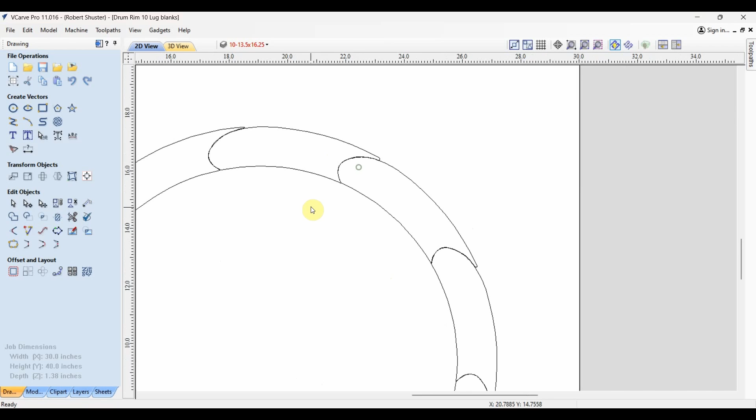As I mentioned before, there's multiple CNC steps for making these rings, so I'll be in and out of design software and shots of the CNC working 3 different times. So the first part is making the blanks. The drum will have 10 lugs. There'll be 10 different pieces here that wrap around. I did a video on this process before, so if you're interested at all in it, you can go to that video and look at it.

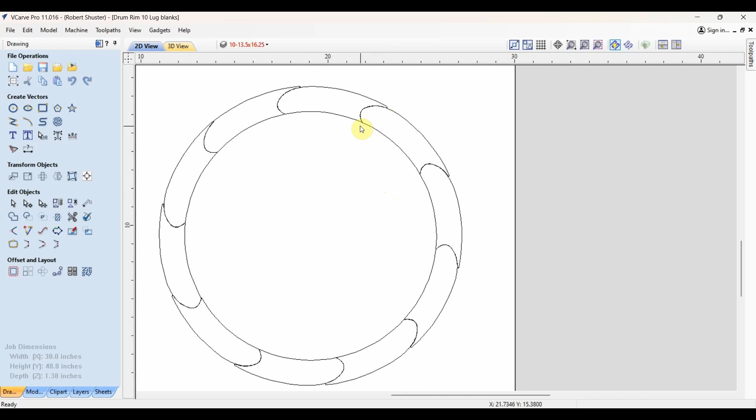Notice how each piece comes together. As I put a strap around this and tighten it up, it pulls it against itself, and I don't need a jig for this to work for clamping, gluing. It actually is quite easy in the end, and it makes a nice shape. I like how I've added a rounded edge to that. So you'll see that rounded shape on the rims for the joint, which, again, is a little prettier.

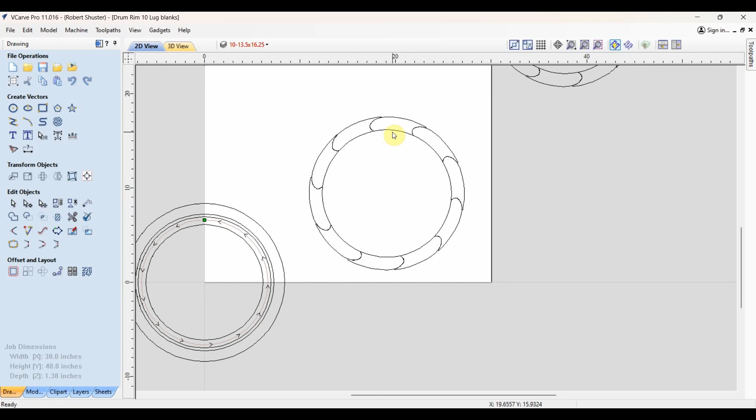After I've cut these out and glued them up, here's a skimming toolpath. I will skim one edge to get it nice and flat, because eventually I will take that to the table saw to split this in 2. This joint, in theory, is a little weaker, so I will split it and then rotate 2 pieces. There'll be 3 pieces total. Rotate so the joint never matches up, so it should make it stronger yet.

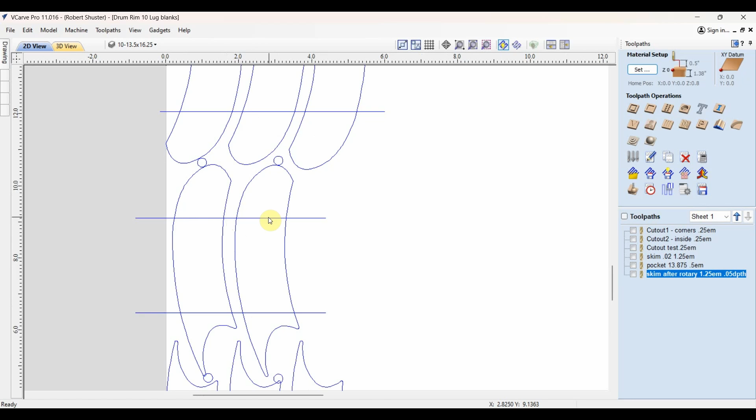This is what it looks like when I cut out the toolpath. And I have those alignment spots so I can line up all my tabs to hold it together. I'm calling 5 of these right-handed and 5 of them left-handed, so there'll be tabs that hold these together. But when I glue it together, some tabs will be on the top, some will be on the bottom, and I use those tabs later to hold it down on the CNC for skimming and things like that. So those tabs actually, in the end, come in useful. A tab is when you cut it out. Let's run that toolpath.

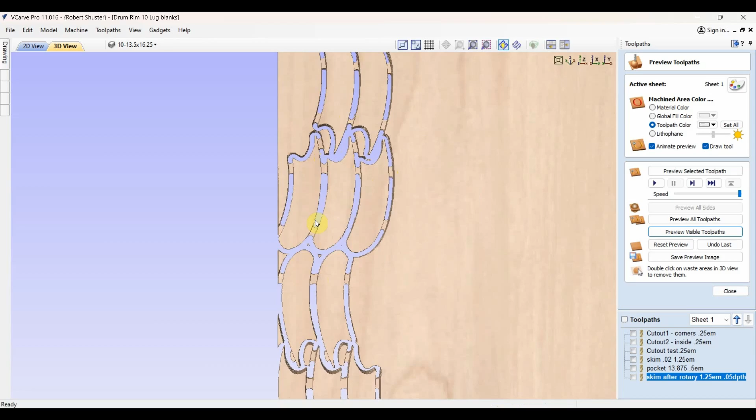The tabs are how it holds things together so it doesn't come off the table bed. And like I say, half these will be on the bottom and half will be on the top when I glue it together. Of course, cut those off. The tabs split down in the middle with my bandsaw. So let's take this out to the CNC machine and see that next step.

When I first set this up, I was a little nervous about where to place the clamps. I was worried about the router hitting the clamps and, of course, things falling apart, ruining the project. So I'm actually doing 2 different tool paths. One I'm calling corners and one I'm calling inside. If you notice here that it's kind of the outside corners, and I have that clamp in the middle closest to us. When I do the next tool path, I'll move the clamps around, and the clamps will be where the cuts have already happened, so there's no chance of it hitting there.

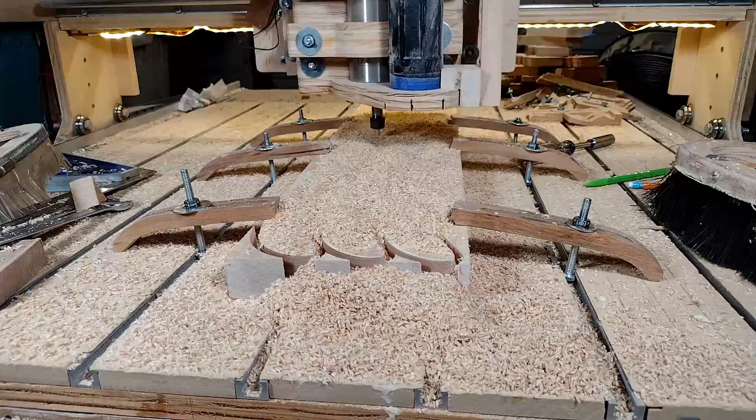And once again, for YouTube, I am not using dust collection, so you can see a lot of chips stacking up around the project. For the glue up, I've got it laying in place there. You can see how the joints fit together. And notice how on some of these the tabs are on the top and some are on the bottom. I mentioned that earlier. That works great for a clamping spot when I put it on the CNC when I need to get one side perfectly smooth.

I put glue on both sides of the joint. I don't go light. Some people probably think I'm crazy wasting glue, but again, I'd rather have a little too much glue than not enough. I've ruined projects in the past where I didn't have quite enough glue and things fell apart and there's no way to fix it. So that's my motto.

And again, laid in place here, put my strap clamp out. And also those tabs, some on the bottom, some on the top, really hold the strap in place very well. After I put the strap clamp on, I will verify it's round using a tape measure, measuring a few spots, but it wants to conform to that shape cut on the CNC, so it forces it into round anyway, almost automatically. So even though I do little tests to verify, it always works out very well.

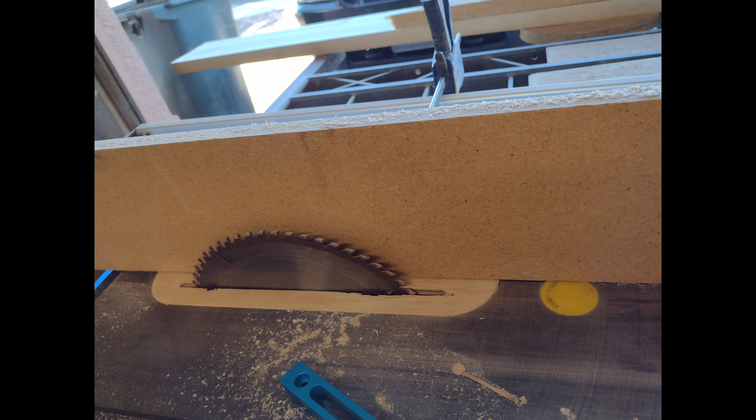I mention this all the time, but I do not like videos of me running a table saw. The table saw intimidates me, I'm nervous about it, and I do not want to worry about getting a good shot over keeping my fingers. So here's just my basic setup with some photos. I have a tall fence that I put against my normal fence.

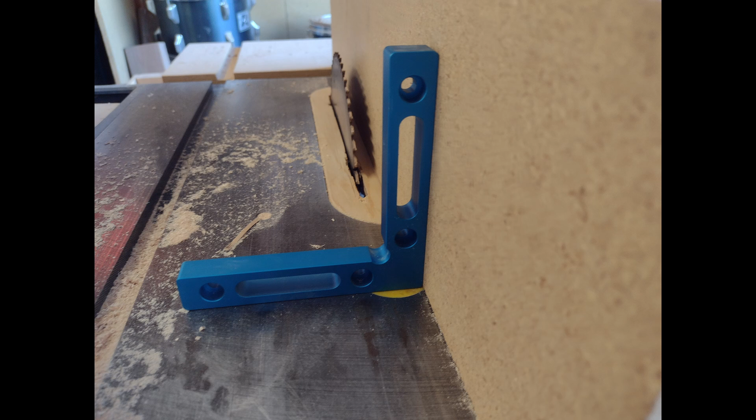I make sure it's a good 90 degrees, and then I will run those rims through the table saw multiple times, keep rotating a little bit, push it through, rotate more, push it through, until I get it split into two pieces. If I take my time, I get a very good finish doing it this way. I don't need to worry about planing it or anything else to get a good finish so it's ready for glue up. And speaking of glue ups, it's that time now. I'm putting plenty of glue on both sides of the rims and going to align them well.

But first, check out that man glitter. You can tell I've been hard at work, and I'm sure I'm driving all the girls crazy with that man glitter. Okay, back to reality again.

Let's do the glue ups. Plenty of glue. 3 pieces. The middle piece is actually beech. The outside rings are hard maple or rock maple. Lots of terms out there for it. It's actually got some heartwood in it to give it more color, which a lot of people don't like, but I like to see the difference in the grains and some color differences in the rims. So I specifically wanted the heartwood in there, or country maple, some people call that one too.

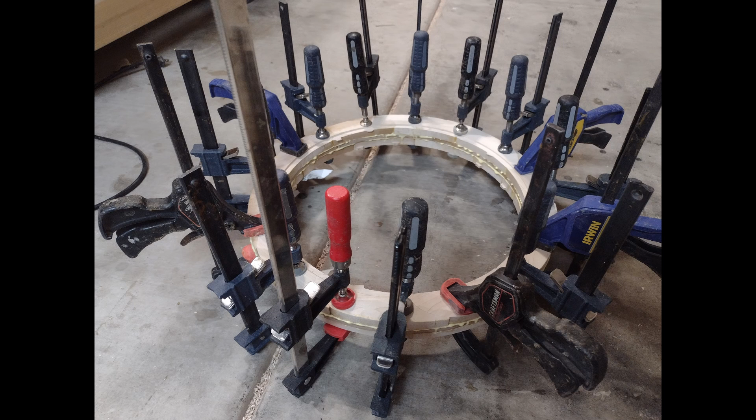There's an old woodworker saying out there, you never have enough clamps, and I could probably use more clamps. I put 10 clamps around the edge there. It might be more, I didn't bother counting, but a bunch of clamps get even pressure on that. I will let it sit overnight, and on the next day, it's time to move on to the next step.

For step 2, I'm going to take this basic shape, this 10-sided or decagon, and I'm going to take it into DesignSpark, which is a 3D modeling program, and I'm going to make that a 3D file instead of right now it's just a 2D outline. It's a kind of convoluted step to do that because I can export this to a DXF file, which a lot of programs work with, but for some reason DesignSpark only works with STEP files.

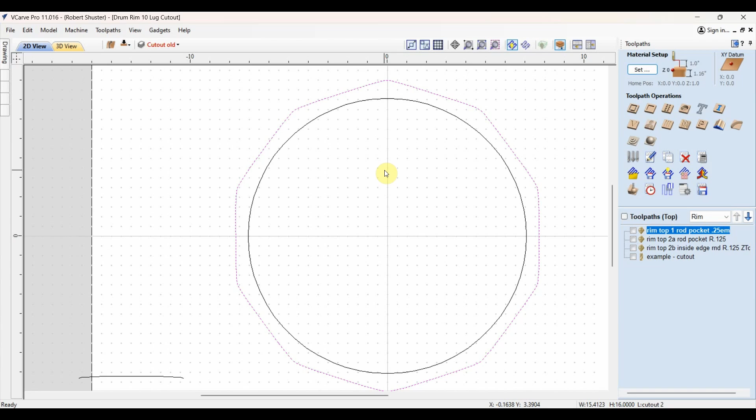So I have to export that to DXF, then take it into FreeCAD, where I can convert that DXF into a STEP file, then import that into DesignSpark. So once I have it in DesignSpark, we'll skip the whole FreeCAD process. I took that 10-sided shape and I extruded it out.

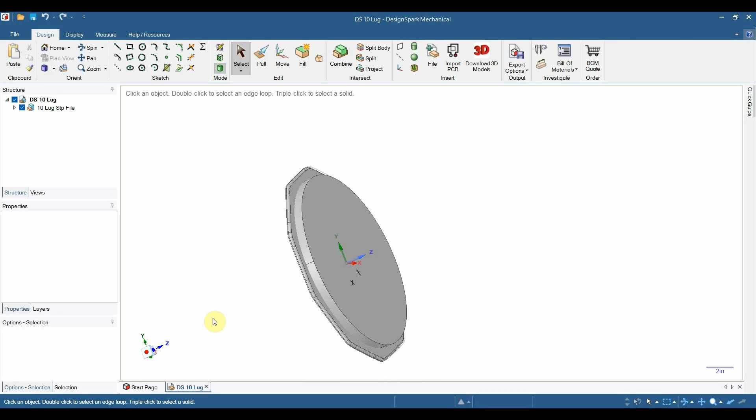I'm not going to show that whole process because I'm not very good at it. And I extruded out, then I rounded those corners on that, so it's got a rounded edge. That's important to me. And I also had to put a circle in the middle, and it's basically 1 inch from this edge here to the outside edge there. That's important when I'm working with 3D files.

Usually when you cut a 3D file, the CNC goes to the edge, and then once it's done with that file, it goes down to the 0 point. Well, the problem on the rotary is that 0 point is that threaded rod in the middle. It's 8 inches down from the edge. So if I don't have that ring here, this circle, the CNC at the edge of that rim would try to drop all the way down 8 inches, and of course it doesn't have much play. It can't go that far down anyway, and it would crash into the rim also.

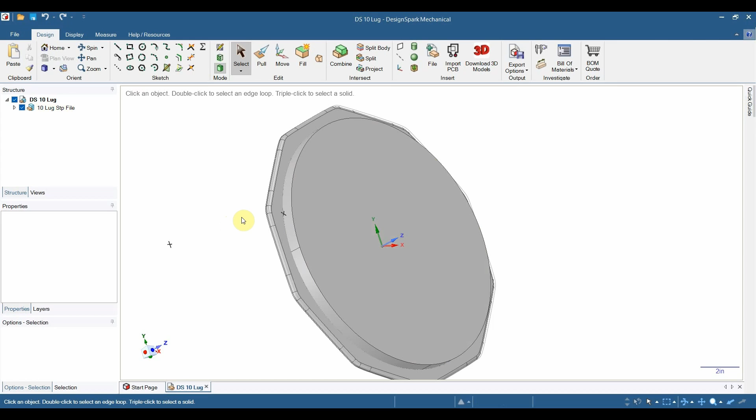So I will tell it to go the shape and then a little bit over and stop at that point there. So you'll never see this in the end on the drum, but of course right now I need it or else the CNC won't work. I will take this back into my 3D modeling program and I will copy it again on the reverse side. So you'll see 2 sides like that, and then I will stretch it and whatnot.

So I get that same, you've heard me talk multiple times about how I get that compound radius. The more I stretch it, it'll get wider this way, but still the same depth here.

Of course, I'm getting messages on my phone.

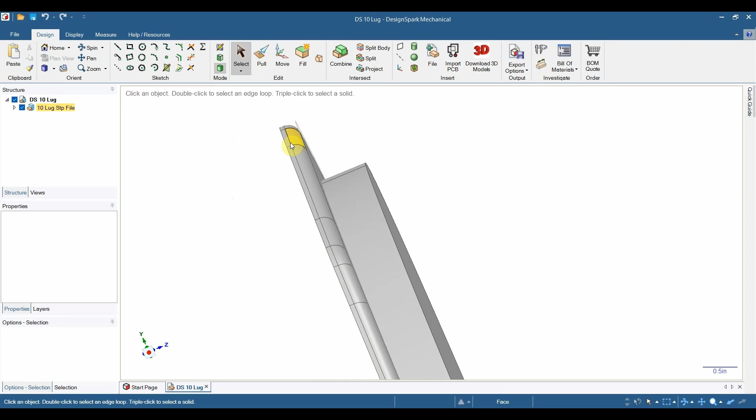So it'll round it and it'll give more of that compound shape I want. And then once that's done, I'll go one step further, and I'm going to have some designs on this edge of the rim. We'll go back and look at that now in VCarve Pro.

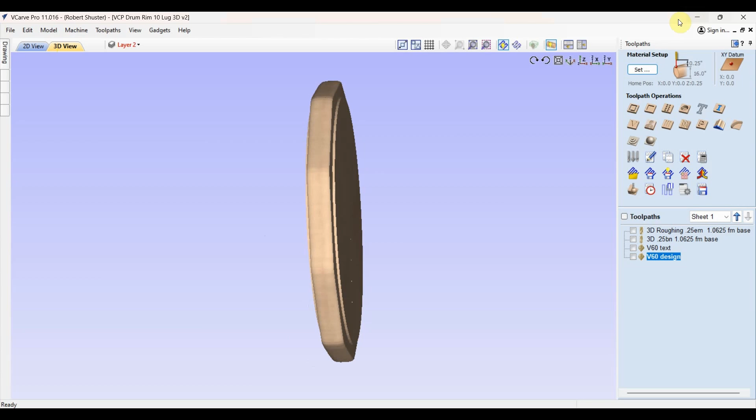So I've pulled that shape into VCarve Pro now, and if we look at this closely, let's go back over to the design part, the modeling part. There's actually two parts to the model right here. There's one half and the other half, where I just simply reversed it so it looks like one piece. And it is one piece in the end. There's that edge where it'll cut down this far and it'll stop at that point.

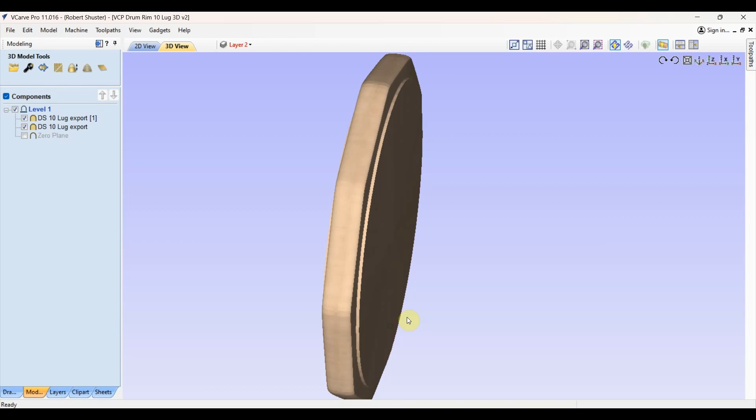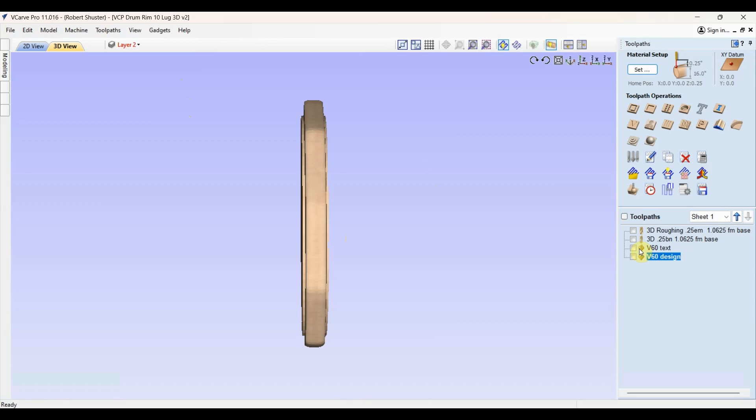So when the toolpath is running, it'll start here, go around, and keep going back and forth all the way around. It takes several hours for it to get around the rim, but it's the exact shape that I want. I wanted that rounded edge on the outside. So it's got that little arc that's kind of rounded that way. And plus now, I can add some design work to it.

Actually, let's go ahead and tell it to run this. We'll preview all the toolpaths, which is going to take it a second. First it does a roughing toolpath, cuts away excess. I tried doing without that, because normally when I do a 3D carve, I don't worry about roughing, because each pass back and forth only takes about 1/100 of an inch off. But because this is 16 inches around, I was getting chatter.

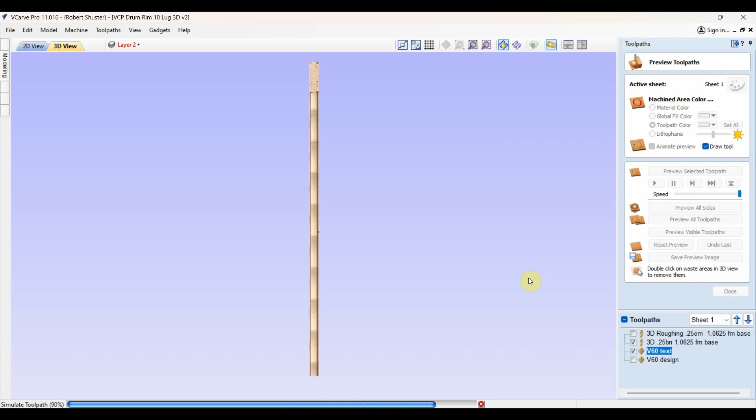I'm getting a big wheel on there, and because of the physics, the torque involved, the bigger that piece I'm cutting, the more edge that bit gets when it bites. That's hard to explain if I even understand it all myself. But the more it does, the more chatter I get. So I had to do the roughing pass and then go a little slower. So this took longer than I expected, but as you can see, I've got my logo on there now.

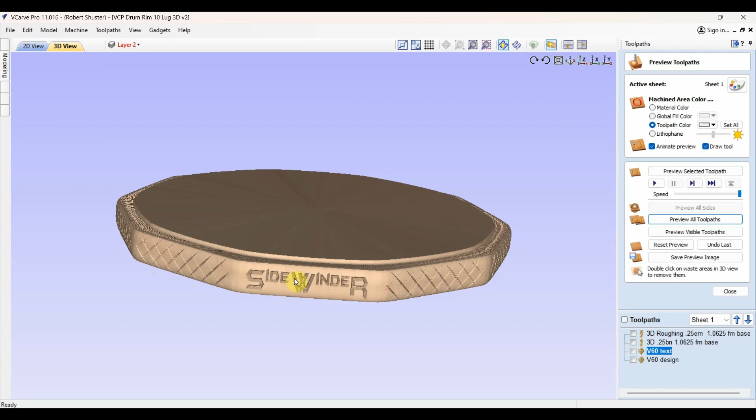And also I put a snakeskin design around the edge. Again, snakeskin drum, I figured a snakeskin rim. It all ties together. I put a lot of thought in this to get how I wanted. In theory, I could put other things around here, other text, other designs, but for this drum, it just seemed right. Let's just see what it says, how long it should take to do these things.

So just the roughing takes over an hour. The 3D pass takes almost 3 hours. Then the V-carving doesn't take long at all. In actuality, I beat that by a little bit, but not a lot. It's a long process. We could say probably 4 hours for each rim just on the rotary CNC, let alone cutting the blanks, finishing work and stuff.

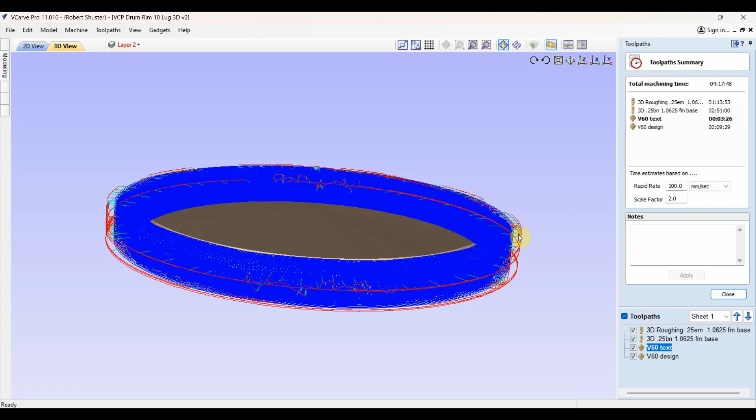A lot of time goes in these rims. I'm sure I could break this time down in a production line. I could get it a little less, but no matter what I do, these are not going to be easy to make. So that's what it looks like in the end. Let's take this over to the rotary CNC and cut this out.

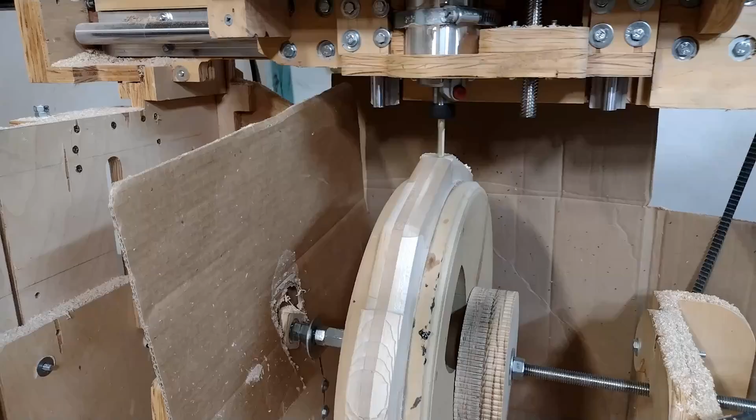If you look closely, you can see that the roughing toolpath has already been done. You can see those ridges along the edges. So now it's the finishing toolpath. That is a 1/4 inch ball nose.

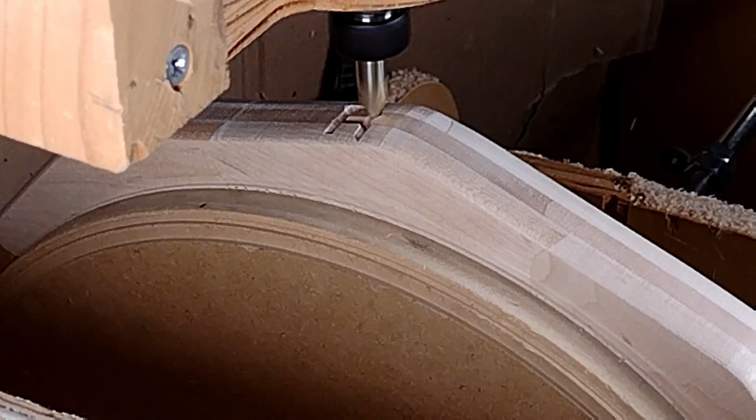And now we are on to the V-carving of the text. I have 2 separate toolpaths, one for the text and one for the design work. As I mentioned before, this is the downcut V60. I really like the downcut V60, and when there's intricate areas, a normal V-bit wants to pull the chips out or parts of the wood out, it chips out, whereas a downcut forces it down, and I don't get as much chipping on the edges, so I really like it for that type of tight design work.

I'd mentioned previously I work in IT. Our group writes software. I primarily work databases, but my team, we are developing applications, software packages, and often the user gets tunnel vision onto one specific little feature that in the grand scheme is probably pretty small, and those crazy features make the application a lot harder to write.

I'm guilty of that with these rims. I really wanted to be able to carve designs on the sides of the rim. In most situations, it's probably not that big a deal, but I tend to focus in on the little details sometimes, trying to get the snakeskin design matched to the drum, these little features that a lot of people might not even catch, but to me it's a big deal. So I spent a lot of extra time just getting those little features to work out the way I wanted.

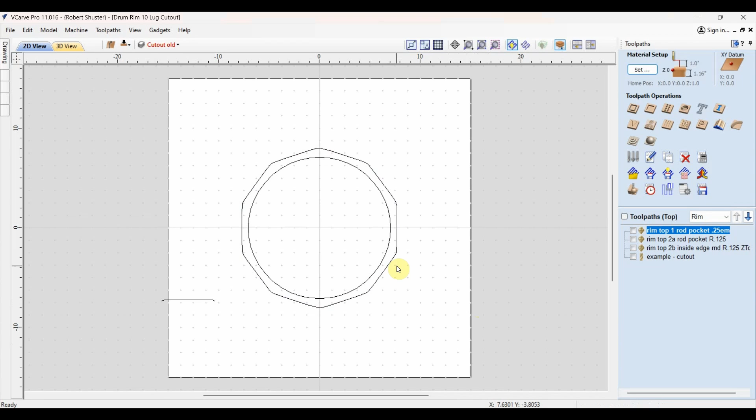So we're back to VCarve Pro, my design software. So now we have the rim that is ready to start the finishing process. For this project, this is actually a two-sided project. So in the setup here, this is double-sided. And I can go back and forth. It has a little yellow side for the bottom and the top. So here's the basic shape, and we can go back and forth so it looks the same right now, but

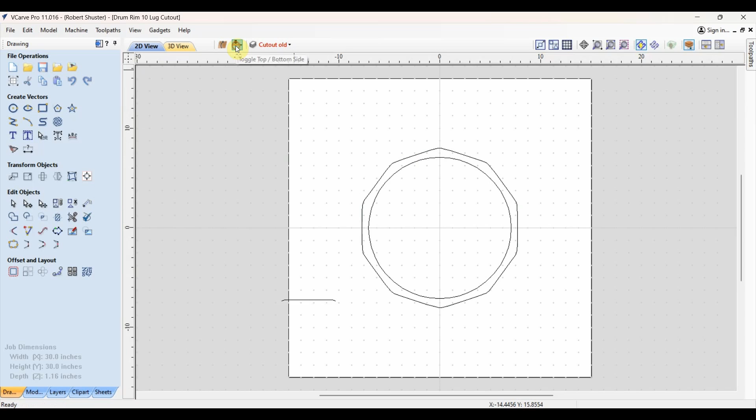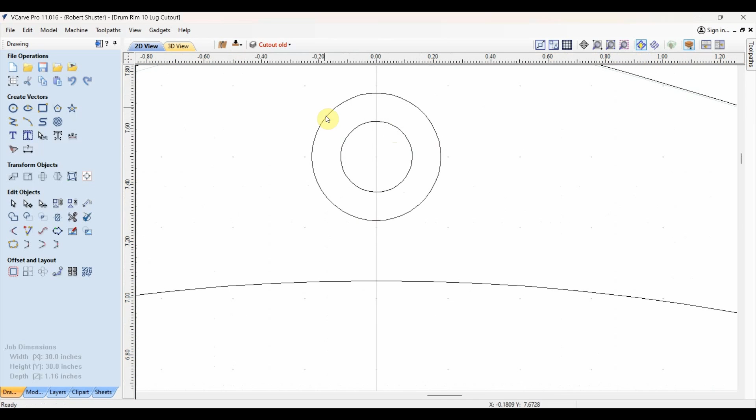I will be adding the holes the tension rods go through. Let's see if I can find the right toolpath for that. Lug holes. And on the other side, you can see that little gray line right there. Let's flip the other side. So the tension rod is like a bolt. It has a head on it. The bolt head will fit inside this pocket, and this will go all the way through. I also add a V-bit that rounds over the edge. That'll cut around these edges so it smooths that edge and smooths the edge here. This outside edge is kind of just for cosmetics at this point because it's already been cut out, that shape.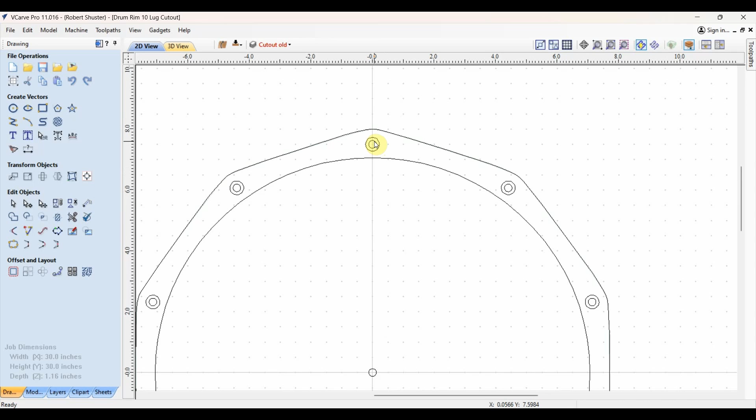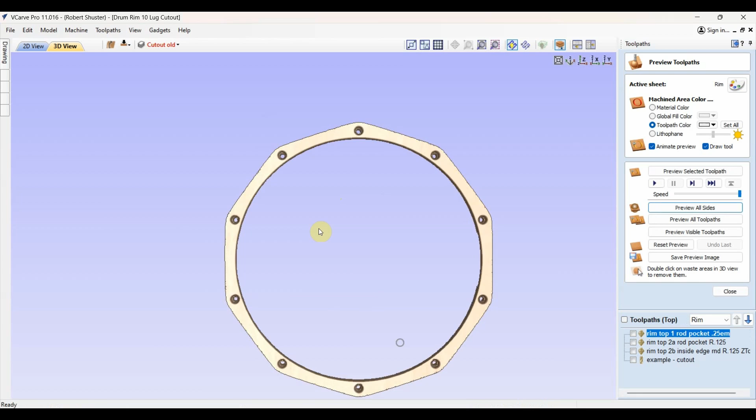To flip it over, I'm worried about this hole and this hole. And I will cut a hole into the bed of the CNC so that I can put a 1/4-inch bit through it and I can line up those holes again exactly right. So even when I flip it over, it should line up exactly right. It's probably easiest to show what I'm doing here by just previewing all the toolpaths, all sides. And like I said before, it shows this outside edge being cut out, which it's not cutting that out. That's just for cosmetics. It's already cut out when I put it in the machine.

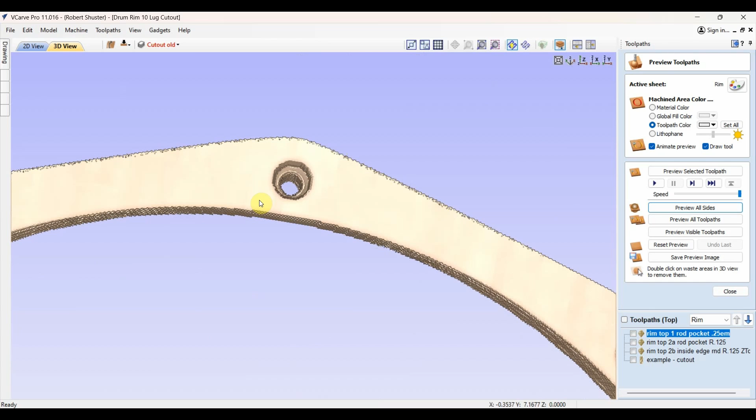So this is the top view. This pocket here is where the tension rod head will fit. And then the tension rod goes through that hole, then goes into the drum to hold everything tight into the lug. I've rounded over that edge there. I've rounded over this edge here. Let's go to the bottom now. And this little edge right here is where the drum head will fit in that pocket, the outside edge. And for the bottom head, this is for the snare wires to go through. It'll make more sense later when we actually see it on the drum.

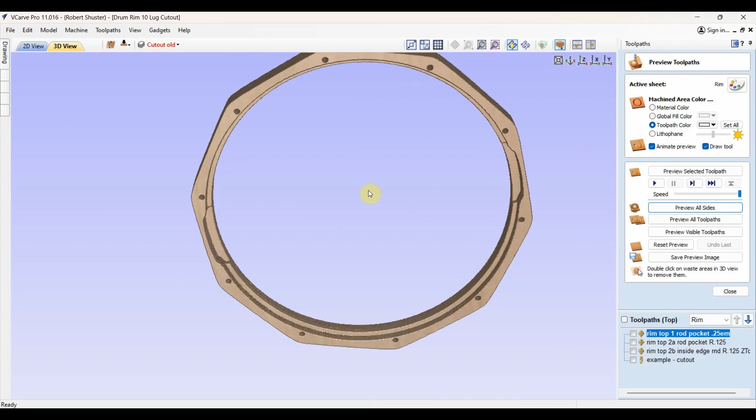So let's head out to the CNC and do this final step of CNC work. This is the bottom of the rim. That's the first thing I will be working on the CNC machine. I actually already cut the inside edge all the way through. That video did not turn out well, so we're just going to skip it. Next step is drilling the tension rod holes, all the way through, those 10 holes. And then the final step will be cutting that inside lip. It took multiple passes, but for time's sake, I am cutting it down to a single pass going around. And a quick cleanup with the vacuum and verify the drum head fits in that pocket well, and it does, as expected.

I'm about to drill the alignment holes on the bed of the CNC. Note above that red line there, I'm typing in the manual commands to move the CNC to where the top hole is, which is 7.5 inches above center. And I'll manually turn on the CNC and go down a bit. And then I'll quickly change that 7.5 to minus 7.5, so it'll go the other direction, below the center point,

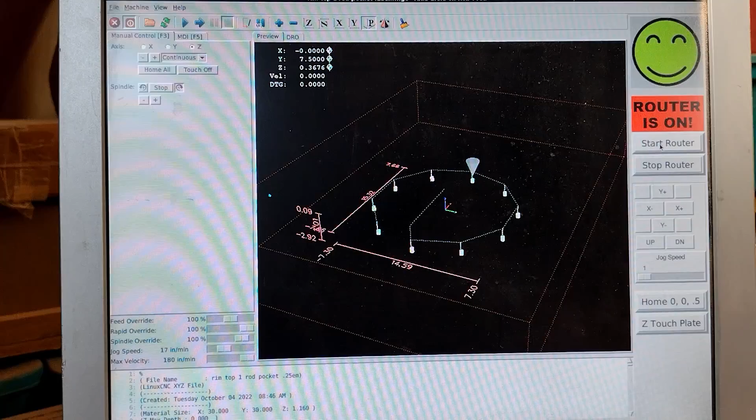7.5. And those holes are 15 inches across, so of course, half of 15 inches is 7.5. Pretty basic math there. Move it down and drop it down. I'm using the keyboard for up and down. I have a button on my pad, you notice, where I can start the router and stop.

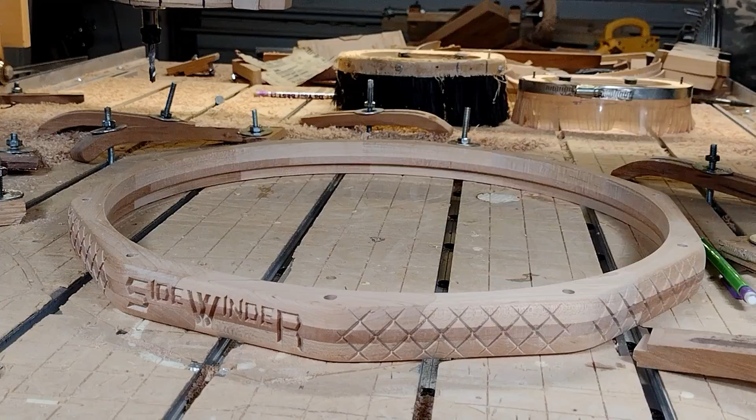Once we have the holes in the bed, then it's time to align the rim up to those holes. I'm just using some end mills, 1/4-inch end mills, push them through, nice and tight fit. Align those holes in the bed that I have, and it's pretty obvious when they drop in just right. And there we go. And now I'll clamp it down so it doesn't move any.

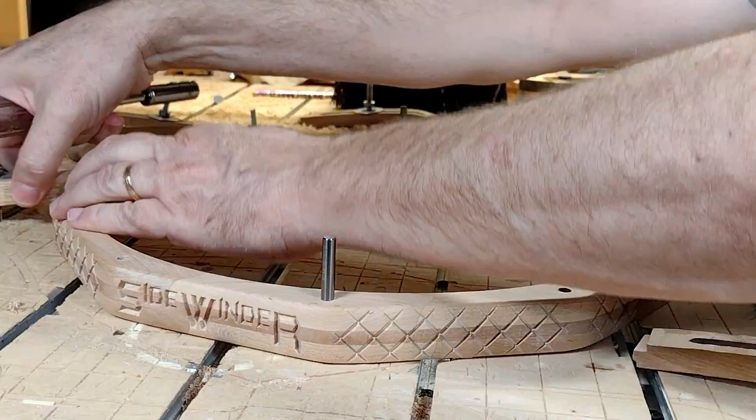And now suddenly, when I work on the top of the rim, it'll line exactly right to things I did on the bottom of the rim. Very important it lines up just right. I can't forget to take out those end mills, the alignment pins, because if I forgot, bad things would happen when we start doing real tool paths.

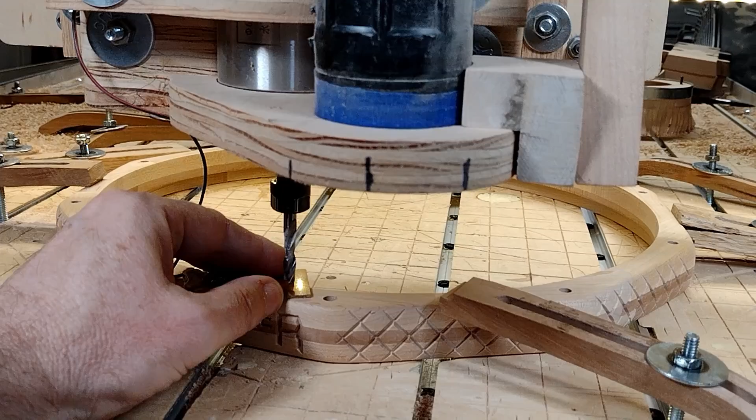I'll use the touch plate to set the height of the CNC so it knows where the top of that rim is. And in this tool path, I will cut the pockets that the heads of the tension rods will drop into. And another quick cleanup so I can get the dust and chips outside those pockets I just carved for the tension rods.

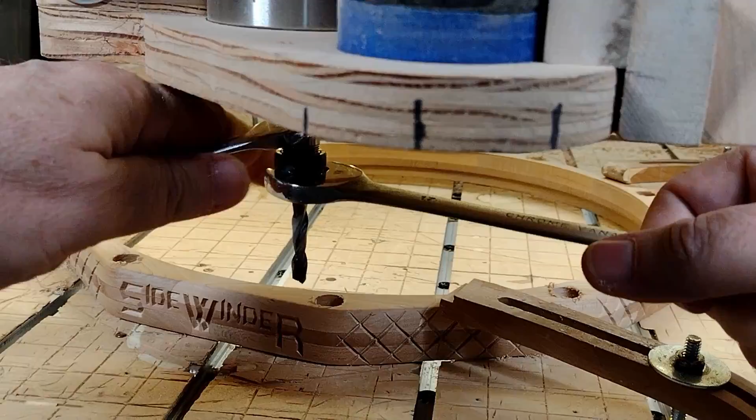Now I'm going to put in a V roundover bit. It has an 1/8 inch radius. When I show it off here, you'll be able to see it. I think the tip actually broke off that a little while ago, but all I'm really worried about is the roundover edge. I don't care about getting a fine, sharp point in that, so it still works fine.

I eyeballed setting the Z height for that bit. It's more of an art form setting these up. I like to set a little high and then keep running again and again until it's just right, and then I'll run the whole tool path. I didn't show all that, but you can trust me. I did multiple tests to get that height exactly how I wanted it. After rounding the edges around the pockets for the tension rods, I also ran a rounding tool path around the inside of the rim of the drum.

All of the CNC work is done on the rims now. Now it's time to start the finishing process. For the rims, I'm adding a little bit of color. I'm using Watco Danish oil. I'll do one coat of the natural, which only adds a little bit of color, and then I'll add a second coat of the walnut or darker color.

I want that darker color to sort of absorb into the cracks, the designs, the lettering. It'll make that pop a little more, and it'll add a little bit more color to the rim, but it's more for the effects of the carvings into it. After the Danish oil has thoroughly dried, I'll put several coats of the same poly Arm-R-Seal that I put on the drum. And once again, I'm really happy with the finish for that Arm-R-Seal.